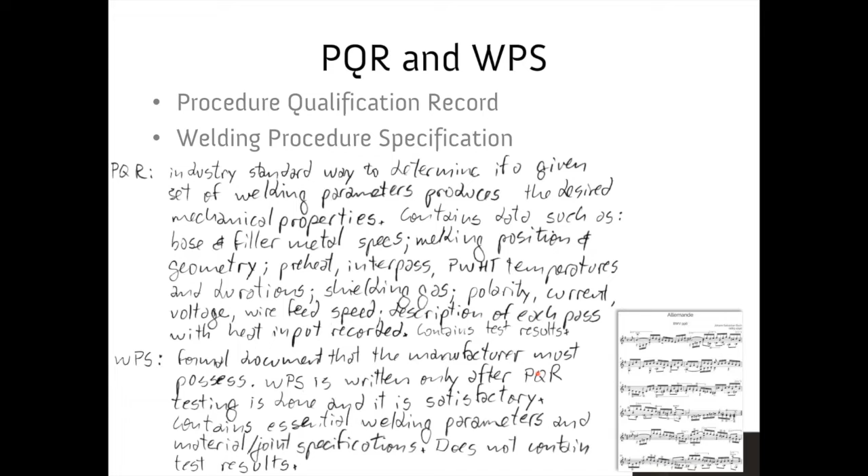Before you're doing a weld that carries some responsibility, we need to have this. If we're gonna be welding fences, we don't need to do that, right? Most of farm welding doesn't use this. But when you want to make a pressure vessel, when you're welding girders for a bridge, and when you're welding structures with responsibility, you need to have it.

So what does the WPS have? The WPS tells you the values of consumables, current, voltage, travel speed, wire feed speed, joint preparation, the sequence in which you would weld, preheat, interpass temperatures. So here we have a very simple example that comes from the Lincoln booklet on gas metal arc welding, which you have uploaded with the notes on welding processes arc, right? And you get to see, if you want to weld plate of certain thickness, they recommend these wire feed speeds, this current, this travel speed, this voltage.

Something interesting about welding is that in welding, we don't try to do the best possible job. And that's so odd to hear, and it's so odd to say. And I myself feel that there is kind of something wrong about it, but there's nothing wrong about it. You don't do the best possible job. What you do is the job that meets the requirement.

Now, if you could do something much better, then what you would do is something that is much cheaper, right? And if you think something much better is needed, then it's a conversation that needs to be had. For example, you can have a weld that has lots of spatter and looks super ugly. You know how to make a better weld, and you make the weld without any spatter.

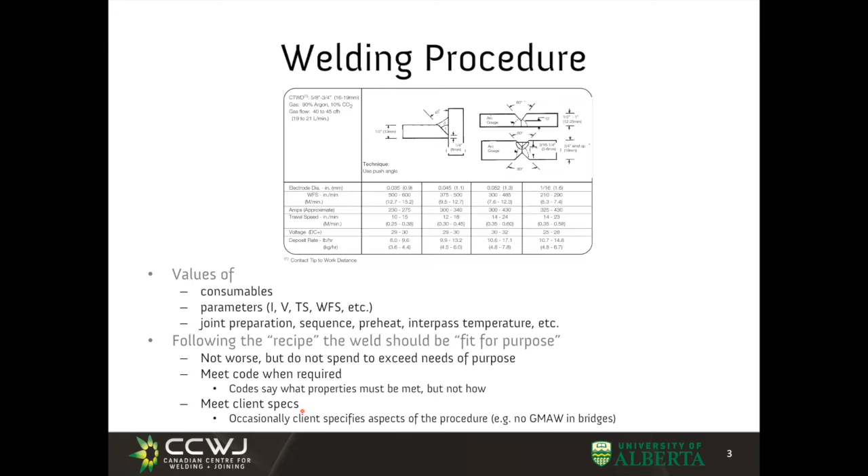Here you have an example of what a WPS looks like, right? This is a WPS that is done following ASME IX. That is something that we're going to be discussing in the last week of classes, the particular subtleties of codes, right? And here you would have the joint preparation, and you use the language of this code that says, okay, the P number, right? That means what base material you're using. You don't need to worry about memorizing this now, right?

And what range of thicknesses you worry about, what filler metal you have. And this procedure actually has a second page, but I wanted to show you what it looks like. What you have here is a music sheet. It's the same thing. The only difference is that in this case, the music is coming together with molten metal.

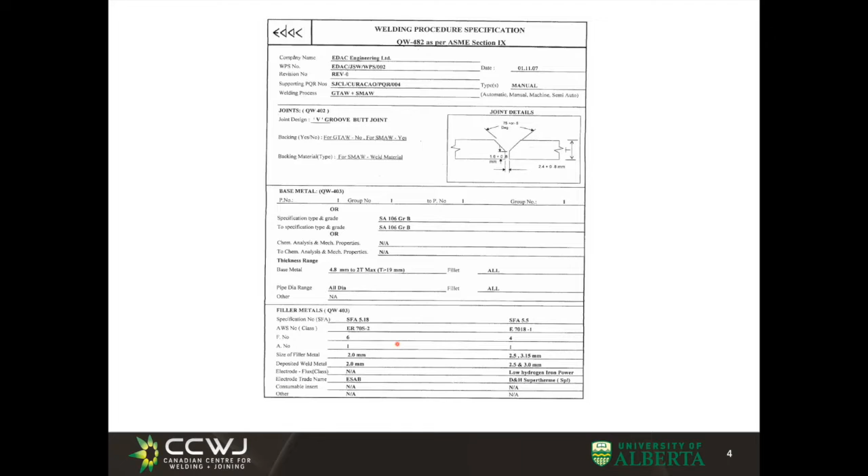Here, you have another example. This is a blank that comes from AWS D1.1. D1.1 is the code for welding structural steel. That is what is used for civil construction. So to some extent, very different than ASME IX. To some other extent, more or less the same thing. This is a music sheet.

In this case, what I'm showing you is essentially the blank staff lines, and it says, okay, what type of groove, what angle, what root opening, how big the root face, all these things that we discussed during our terminology lecture, right? And that's why at the very beginning of the class, we do this thing that I don't find particularly pleasant, that is learning this new language and all these new words.

And even if we didn't understand exactly what those words were, now they're starting to come together as we discuss different things. But in these two previous slides, all I wanted to show you is what this music sheet looks like in welding, how we tell the welder, hey, this is how many amps, so many volts, and you have to prepare the groove this way.

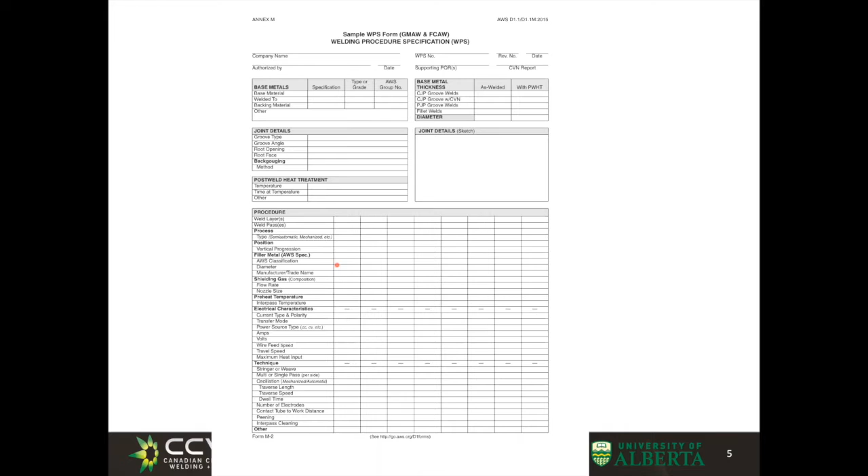We talked about the variables, right? The welding parameters. And without getting into depth, because we're gonna see this in a little bit more depth later, but as you can imagine, some things should not be changed, and some other things maybe don't really matter, right? For example, if I change the alloy of my filler metal, probably that matters a lot. For example, if I change the gas flow by a little amount, in MIG, right? Or if I change the electrode diameter, but not by much, maybe it doesn't matter, right?

And who decides that? Well, because we understand the fundamentals, we're gonna have a sense of why things can be so important or so not important. But when they are trying to make weld recipes for everybody, they say, okay, look, you don't think, we'll think for you. And this is what our infinite wisdom says. And in the case of ASME IX, it says there are three types of variables. They call them essential, supplementary essential, and non-essential. Obviously, the non-essential, they say, if you change it, is not a big deal.

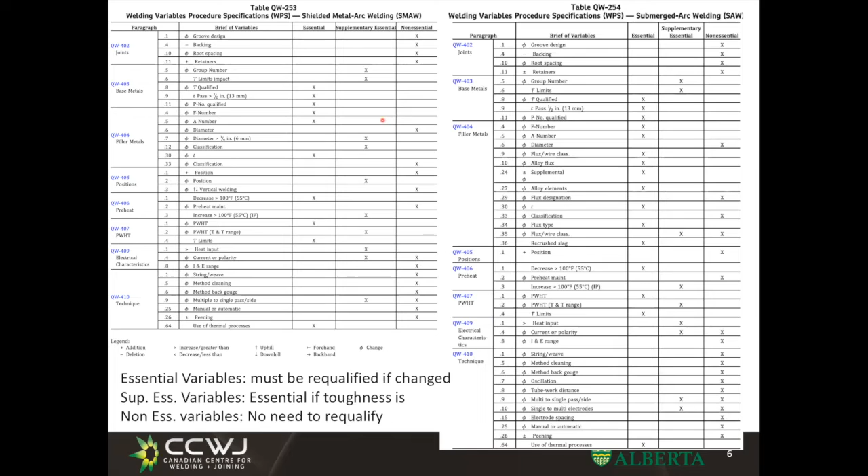So that said, right? If you want to make a pressure vessel out of titanium, ASME will say how you go about it. But for the vast majority of cases, we're going to be welding carbon manganese steel, low carbon steel. The vast majority of cases, so much so that some people say I don't even care about other things. I don't approve of that. Rockets are not made out of steel, or seldom, and they matter a lot. And you need to weld something. It's typically going to be structural steel. And you say, what I weld today, I'm going to do exactly what I did yesterday. And you know what? It typically works. It typically works great.

So for all of you taking this class, let me tell you something. 90% of welds, you didn't need me. You actually don't even need to know how to read and write. You just do today the same you did yesterday, and almost always it's going to work. And again, the problem is not the almost always, it's that when things don't, who's going to help you? And that's the difference between first world and third world. And I know very well about one of those, right?

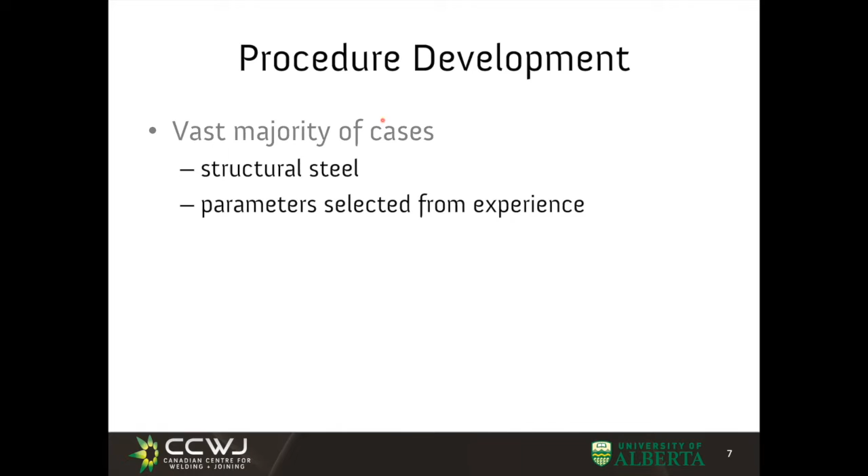Say you wanted to make a special pressure vessel for whatever reason you need it. For example, because you're dealing with oil sands. Chances are that what you did yesterday with the standard carbon steel might not help you. What do you do then? We need to know. All right. What can help you? All right, let's say what I did yesterday is not quite right for today.

I'm going to look at the supplier info. For example, this is information for 7018 from Hobart. It says if you get our electrode that qualifies for 7018 AWS classification, the 1/8 diameter, you should run it between 90 amps and 165 amps. 130 is the sweet spot. At that sweet spot, you should have more or less these volts, and it would melt this amount of wire, and this is the deposition efficiency. We'll have a whole lecture on efficiency, so let's not worry about this number right now.

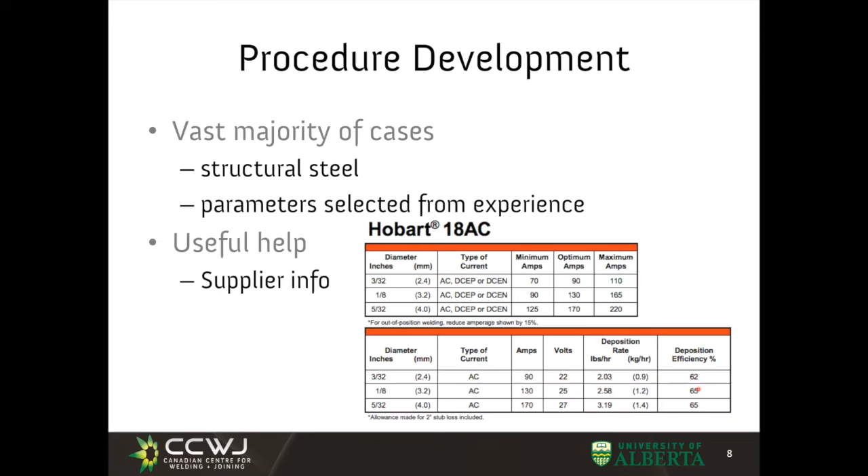So either I do what I knew yesterday, from yesterday, and I'm good, almost always. I call my supplier, or I go to the website and download the specs, and it already tells me the volts and amps. I'm styling. But let's say for whatever reason you still need to do something that is a little bit more difficult. Then what do you do?

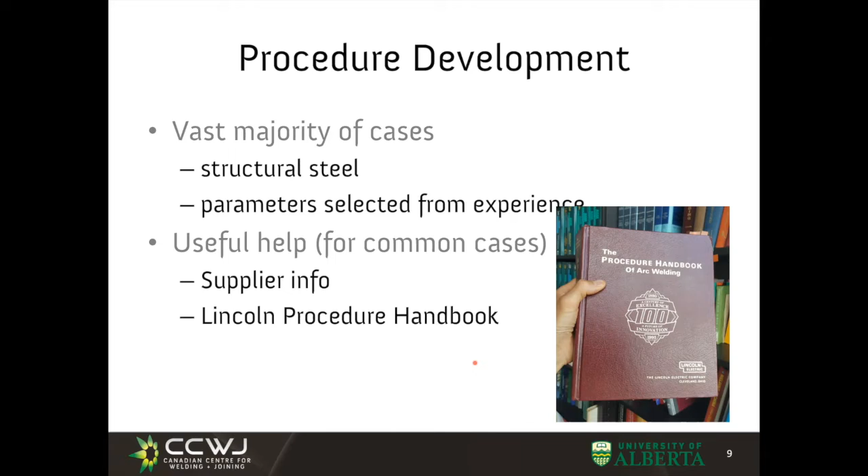You go to our Bible, right? Here I have it, I have two versions. The one I have here is the one that I got when I started my PhD. Now, if you have this book—oh my gosh—if you have skimmed through the book, that's why I said this book we need to have, especially for this lecture and for the next exam, you're gonna see lots of pages that look like what I'm showing you here, and I've scanned some of the slides.

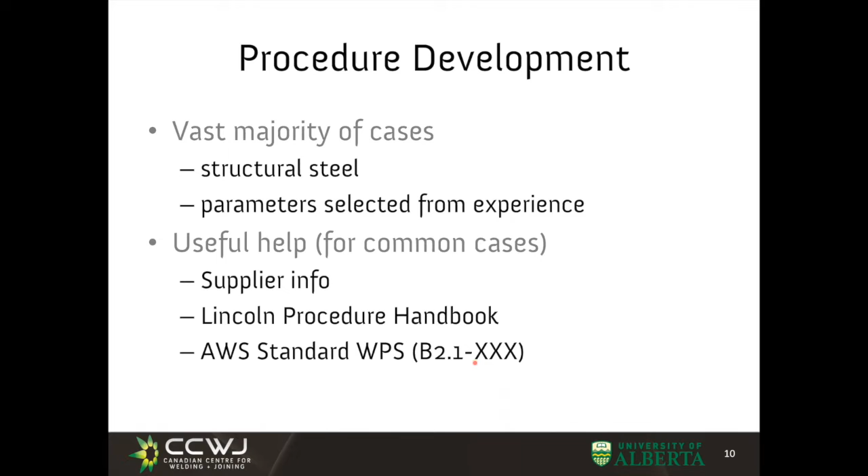AWS also has standards for some particular welds. So for some things in concrete, AWS will also tell you, this is the way you weld it. And these are expensive documents, because somebody had done these welds and tested them to make sure they work.

And if you go to the AWS site, these are the B2.1 standards. There's a whole family of standards, whether you're welding pipe or things for naval applications, sheet metal or plate, and different processes—MIG, stick, or TIG, they have TIG here—and depending on what base metal, right.

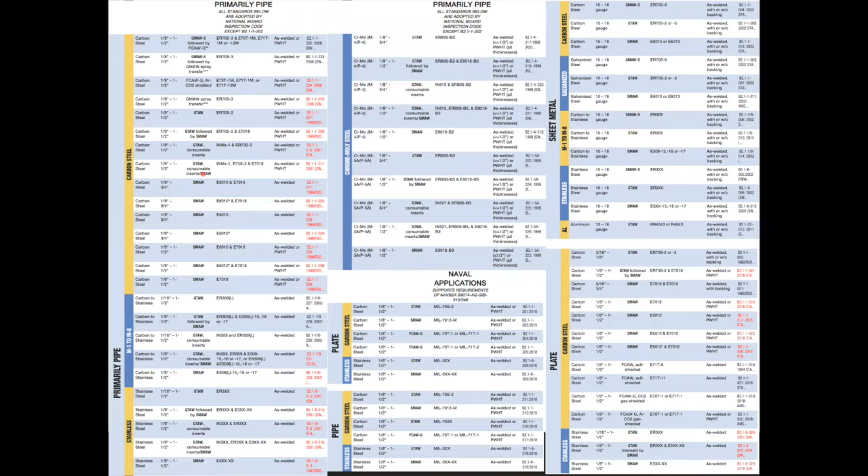So you have resources out there. Either you do what you did yesterday because it worked, you use the manufacturer's—the supplier of welding consumables—you use the Lincoln Procedure Handbook, which is an amazing resource, you can buy the AWS standards, the standard welding procedure specifications that I'm listing here. And even, there are even welding calculators.

So I have these two myself. These are like slide rules made out of cardboard, but they are so useful. And you can go online, and pretty much every supplier of welding consumables or welding equipment today has an app that asks what thickness you want to weld, what procedure, what process you want to use, and it will give you the volts and the amps and the travel speed.

Why are you taking this class then? Most of the time you didn't need this class, but you take this class because you will be the person who makes a difference when everybody else doesn't know what to do. You will be the person that, when there is a problem, can think and say, I think this is what's going on, I think this is what we can do to solve it. You don't need to take this class to weld what everybody else welds, but because you take this class, you will be able to do what few, if any, can do. And that's the point. But I want you to be aware of all these tools we have, because before we start thinking deep, we should use whatever is readily available. We don't want to reinvent the wheel.

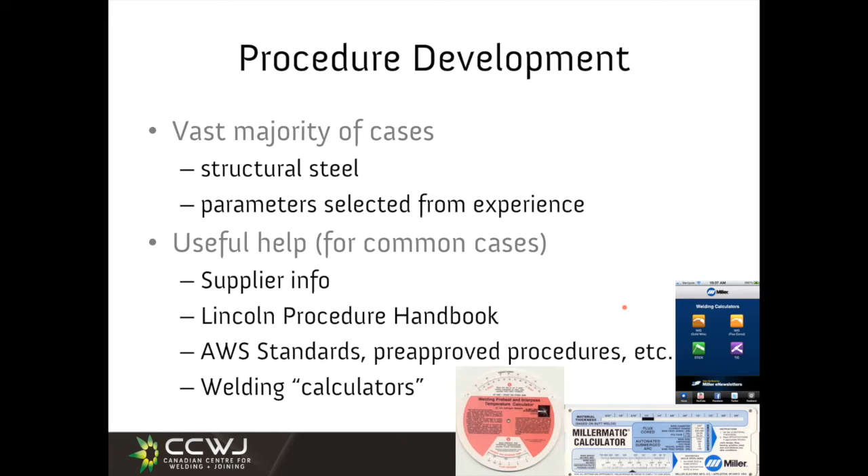What could be those problematic cases that get people stumped? Things that have an off composition. For example, when you buy steel, you say I want a steel that meets these specifications. Sometimes they don't meet the specifications, and you need to authorize a deviation, or maybe you don't want to authorize a deviation, but somebody needs to deal with that—and that somebody is paid well. Sometimes the plate material you bought says you should have all these things and you should not have all these other things, but they don't list all of the periodic table. They list the things that historically have been relevant.

It has been the case recently that some steels came with too much boron, but the standards said nothing about boron because boron was never a problem. And if you have some amount of boron, the hardenability of the steel is enormous. So you were buying a steel that met the specs as it was meant to be, but the steel sucked. It's even worse, you know.

From what I heard, in Europe there are restrictions on boron in steels. In North America, not. So the suppliers were sending the good steels to Europe, and we were getting all the other steels. Isn't that crazy? We need to understand what's going on so we can get good standards, and maybe have a client spec when we buy something, which now we do.

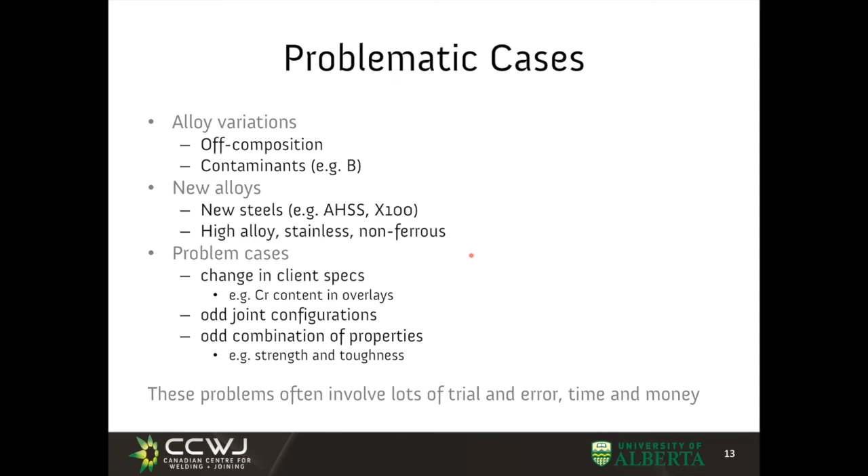So what we're doing today is I would like to navigate the Lincoln Procedure Handbook. It's early in the course, and we're already going to do essentially the bottom line - determine a procedure. And with that alone, you're going to be amazing when you get a job. The rest of the course will be understanding this to see how it takes us to the next level. Okay, so let's see.

So if you look at the chat, we have comments from somebody with Eddie, who has a long experience welding for real. So if Eddie agrees with me, then it's definitely true. Thank you, Eddie, for the comment.

I'm going to start talking about steels. And of course, we're going to be able to do aluminum and zirconium too. But steels is what everybody uses, what most people are using, and for which we have a lot of information. So let's not start running, let's start walking.

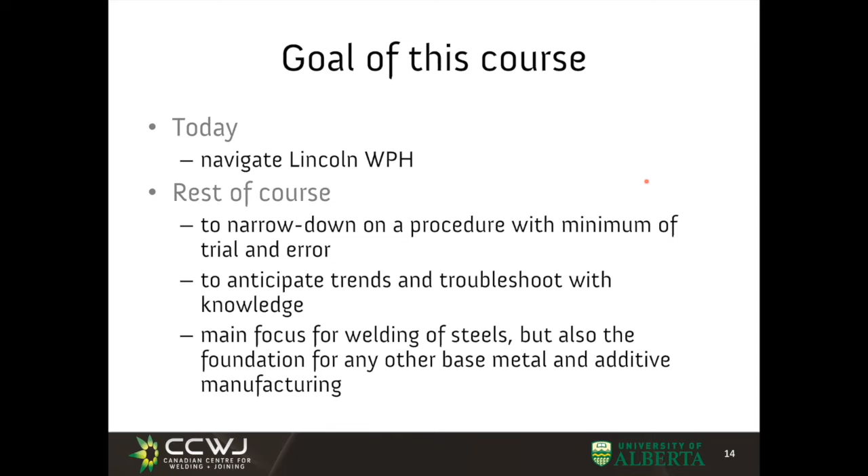Okay, for a welding procedure, I want to plant this as a seed. We're not going to use this right now, but for designing a welding procedure, which is what we're going to do in the rest of the course, we need to do three things.

One, we need to understand how the material responds to temperature. That is metallurgy, and we'll be talking about metallurgy starting on Tuesday next week.

Second, you need to know what temperature you're putting into the material. You know how the material responds to temperature, but you don't know what temperature you're putting in. For that, we need to do heat transfer. I know many of you took heat transfer with me during the winter. You're gonna see what amazing things can come out from heat transfer, which we don't teach in the class, but it's very much similar to the things we did in class, and we can predict important things.

And third, we need to understand the behavior of the process. Even if I have the same material with the same temperature experience, it's not the same with short circuit versus globular transfer versus spray transfer, because the physics and mechanisms at play change the depth and width of the bead and many other things that affect the final look and final properties of the weld. We're going to discuss those when we talk about metal transfer, the plasma arc, and other things.

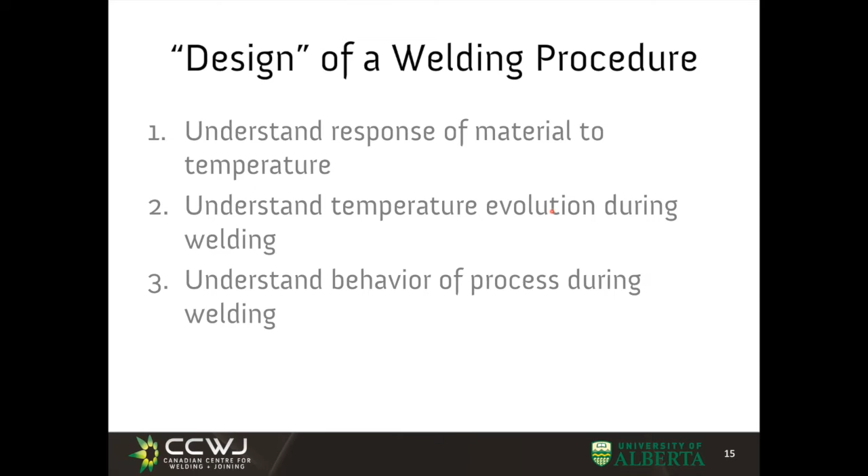So, well, I don't need to say more about this book. And on this note, what I'd like to do is check with you and go into a group task. We are more or less 20 people in the class right now, and what I'd like to do is divide you into groups so you discuss things, and I'm gonna be popping into the different breakout rooms.

I know one of our friends here doesn't have the handbook yet, so I'm going to make sure I pair this student with others who have the book. Does anybody else not have the book? I think most of us do. No book? Okay, we have two. Anybody else? Okay, thank you, thank you. You have to tell me.

Okay, so we have 1, 2, 3.

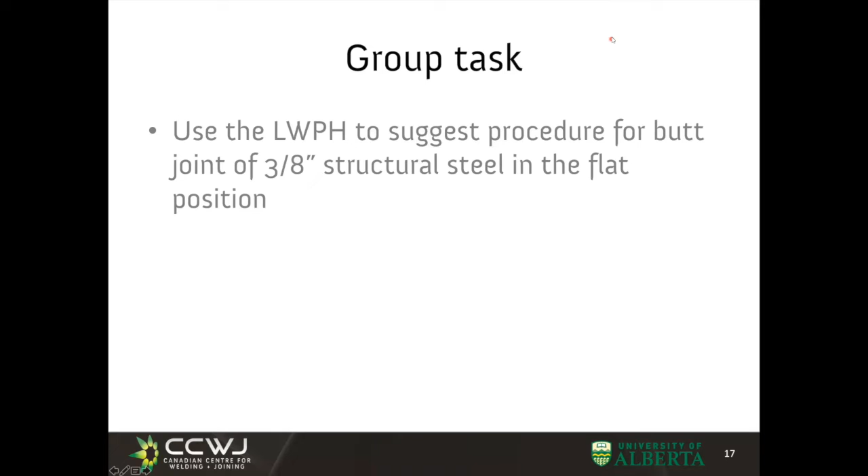If anybody wants to share, say anything in the chat. I visited each of you, and I think it went more or less okay. I hope you did. You guys enjoy it? Anybody wants to comment? Was it okay? Yeah, it was good. All right. It was good to see some faces. Yes. Isn't that something new? Getting to see your other classmates.

So we have 20 minutes, and in these 20 minutes, what I would like to hear is what procedure each of us has done. So I would pick randomly somebody from each group to say a couple words and discuss that procedure. Let's start with Eddie. Do you want to discuss, Eddie, briefly what procedure you chose? You can say the page number. Yeah, briefly, page 6.4-23. 6.4-23. All right.

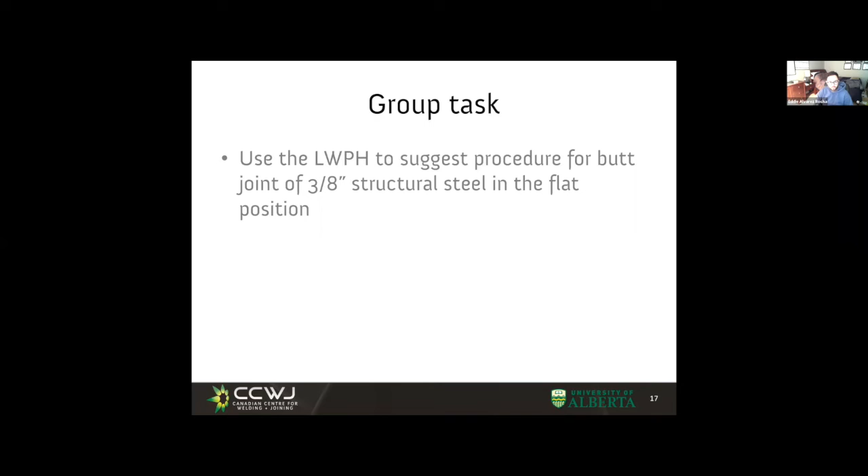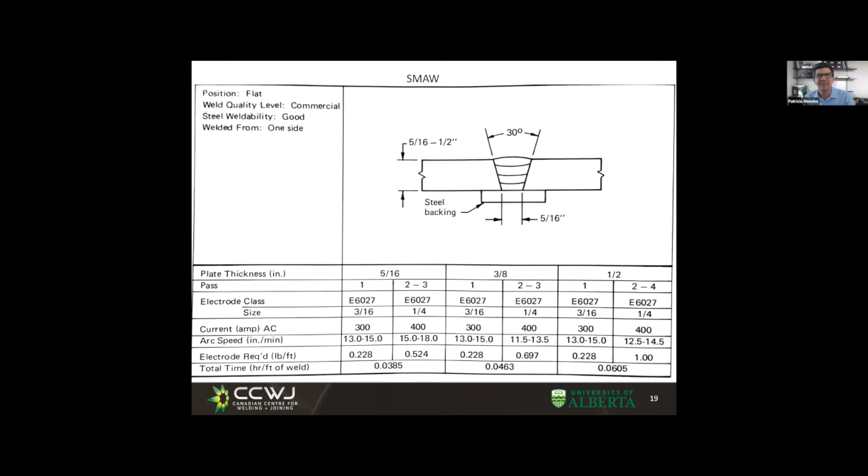Let's see. 6.4, oh, very early. Okay. 6.4-23. Hold on. Oh, we have a different version. Oh, no. Okay, we don't have a different version. What procedure is 6? Self-shielded flux core. You're close. Yeah, close. Mine is self-shielded flux core arc welding, semi-automatic self-shielded.

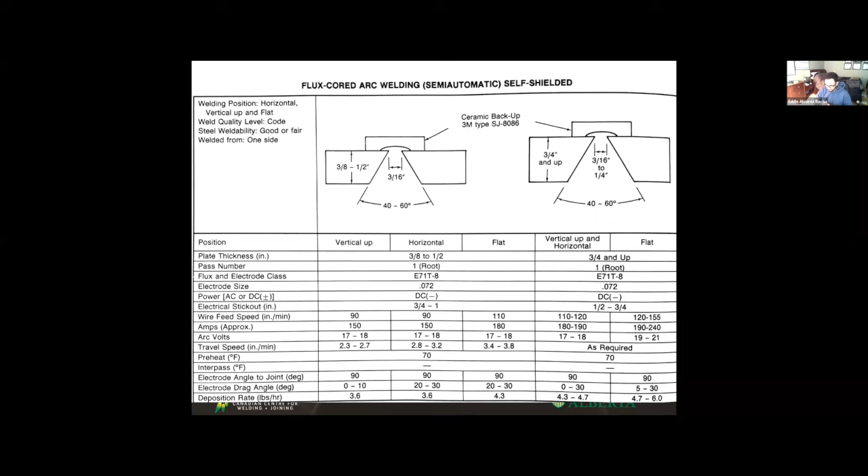Only thing to add that's not really stated in the question was the steel backing. We chose this because it's self-shielded. It's for structural. So for structural, this is commonly used. It's quick, and yeah, I don't know what else. Hold on. I got it there, right? This is it. Yeah, that's it. Yes. It's awesome for 3/8 steel, it's easy to work with, and especially if you have steel backing, you can really pour it on there, and it should be quick, right? Yeah, and this is awesome.

This is awesome. And what I want to highlight here is, although you guys are only starting to take this welding class, as of today, you can go to a welder and say, look, for this particular application, if you weld it using this procedure, it's likely it's going to pass the qualification. This is very powerful. This class is not only about the theory, of which you'll see plenty, but you already have a magic trick up your sleeve when you have a job. So thank you, Eddie, for the suggestion, and thank you to the teammates.

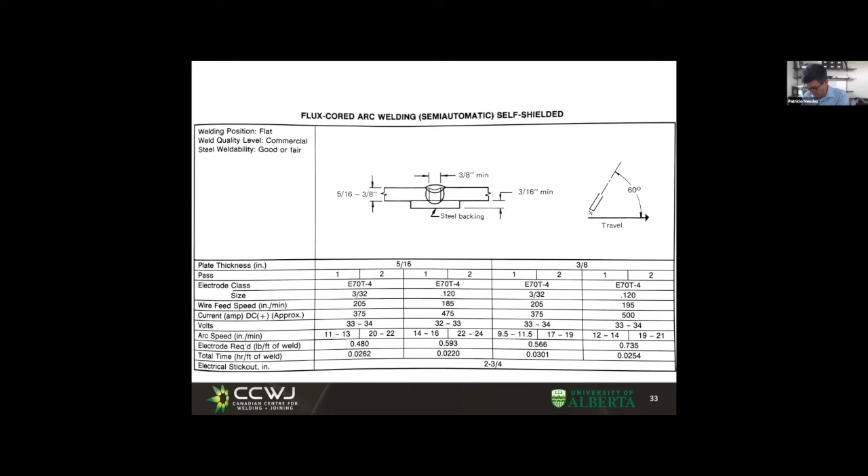6.3, or 6.2. 6.225. 6.225. All right. I'm looking it up because chances are that I already looked at it early in the morning. Aha, I like that. Actually, this one I went deeper into detail. So it's shielded metal arc, stick welding.

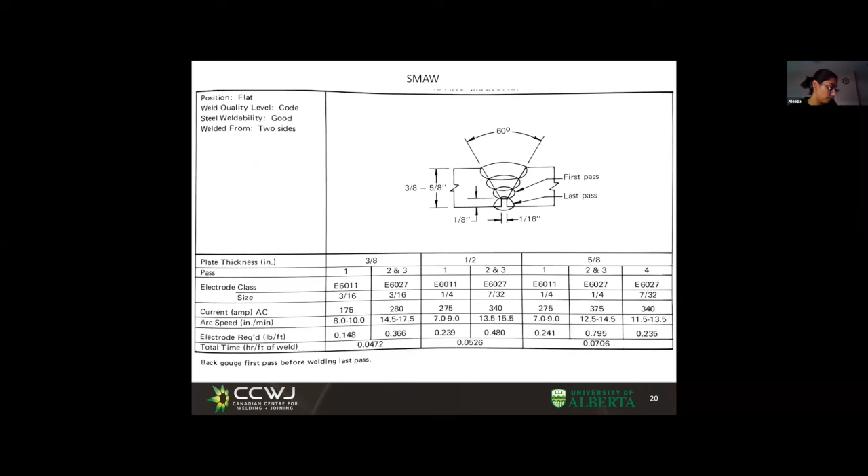Yeah. And we chose the one without the metal backing just because we didn't have enough instructions, and we thought that it would be better to go without it just because it's not always available. Right. You see, a funny thing is when we come from an engineering side, we don't like the backing. It looks ugly. When you come from the welder side, you say, this is going to help me.

And we go back to the fit for purpose. If it is fit for purpose, it doesn't matter if it is ugly, right? So this is great. So here we have 3 passes in this one. And what is interesting about this one is the first pass is in 6011, right? If you remember, that's a cellulosic that has a potassium binder, so it can run on AC, right? It is what we would use with cheap welding machines.

And 6027 is an electrode that has lots of iron powders, so it gives you a very fast fill. It is similar to 6024, but it gives you a higher quality deposit. I don't know exactly why that is, but it is the alternative to a high deposition electrode when you want a slightly higher quality. Thank you. So yeah, this would be good.

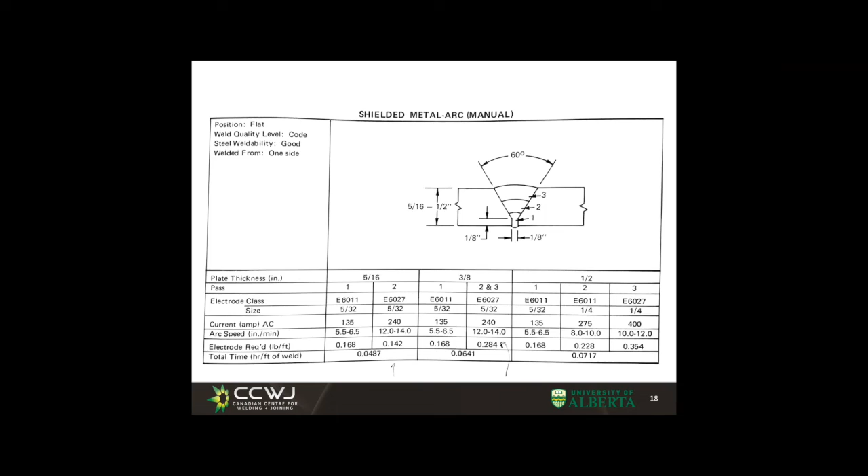Sure, we've found a couple. So one of the ones we were looking at, I believe, was 6.3-67. 6.327. All right, you're talking about subarc welding. I like that. We're talking about all kinds of processes, huh? Okay. Yeah. So it was good for 3/8-inch commercial steel. Is it 37 you said? 67. 6.367. Okay, give me a second because I'm gonna show it to the whole class.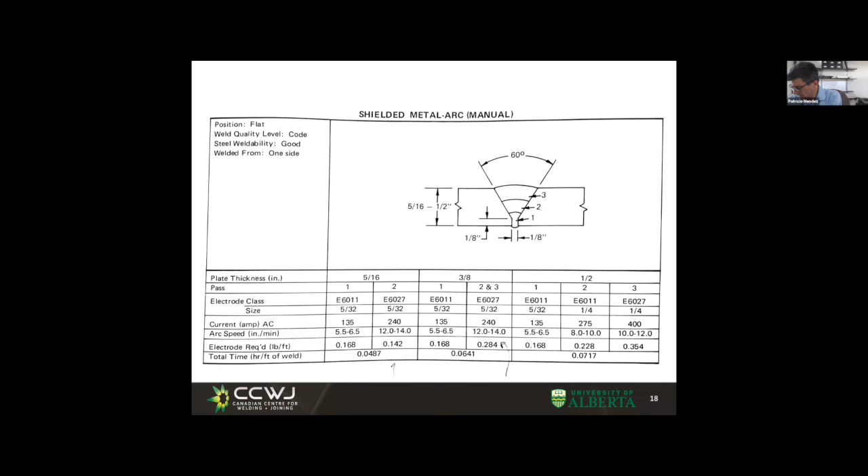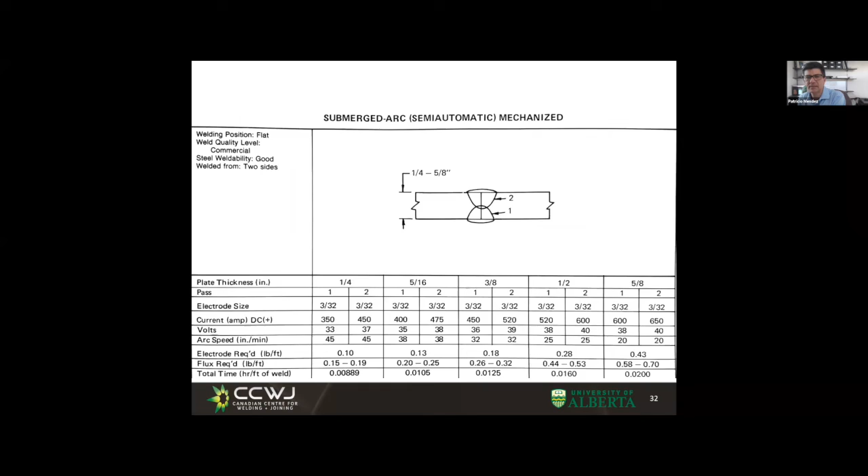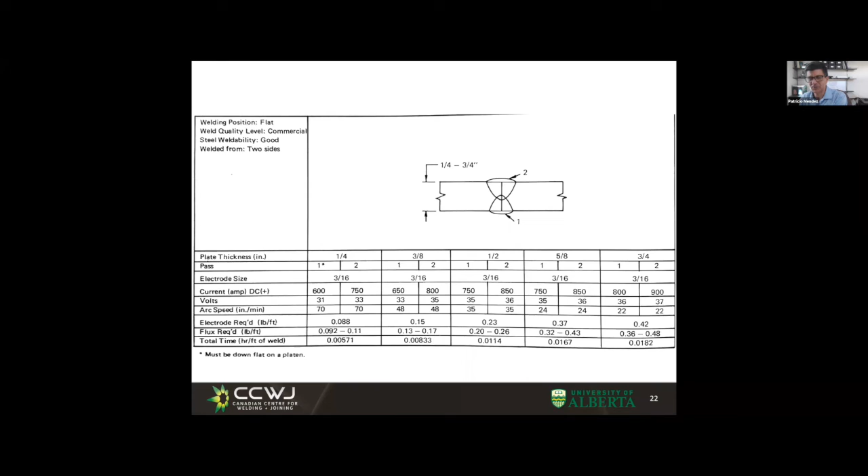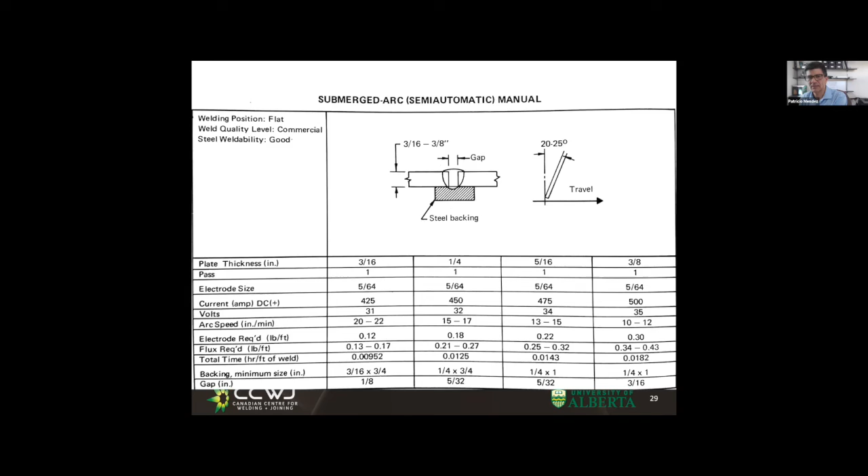I might have it, subarc welding. The 367. No, I passed it. It's moving. No. I think it's, no, not this one. Not this one. Show the middle. Subarc welding. Let's see. I need to recognize it. 316 to 38. Not yet. 38. Did you get it? Is it? Yeah, I think.

Awesome. All right. So tell us more about this choice of procedure. Well, we looked at a bunch of different procedures, and then we chose this one mostly, I believe, for the total time required. It was the shortest of all the ones that we found. Yeah, that's awesome. And you know what? Of course, that's the idea of subarc welding, right?

This high productivity. And if you remember our very first class, when I talked about the T-34 tank that the Russians were making, the difference between the Russians and the Panzer tanks is that the Russians were welding the tanks with subarc welding, and the Germans were using stick welding. You cannot compare it. So I like your choice too.

Again, a shop might or might not have a subarc welding machine, right? So sometimes the decision is not as easy as saying this is just faster or this or that, but what do I have around? This is great. So let's move on. Wesley, do you want to tell us about what your group chose?

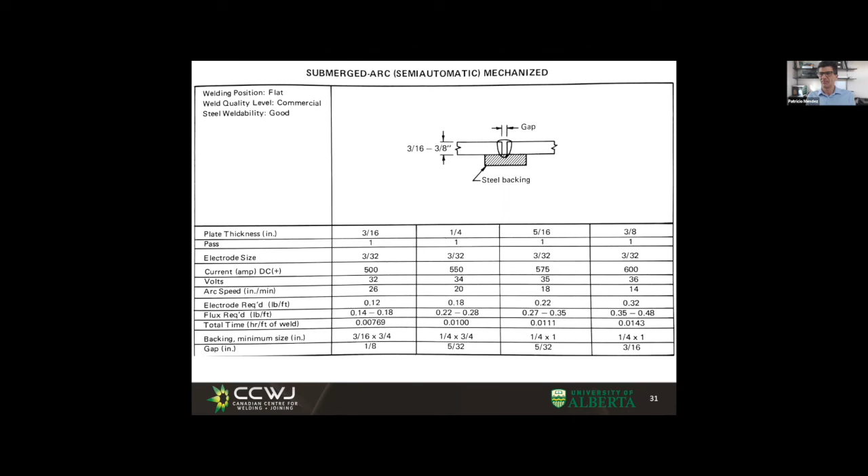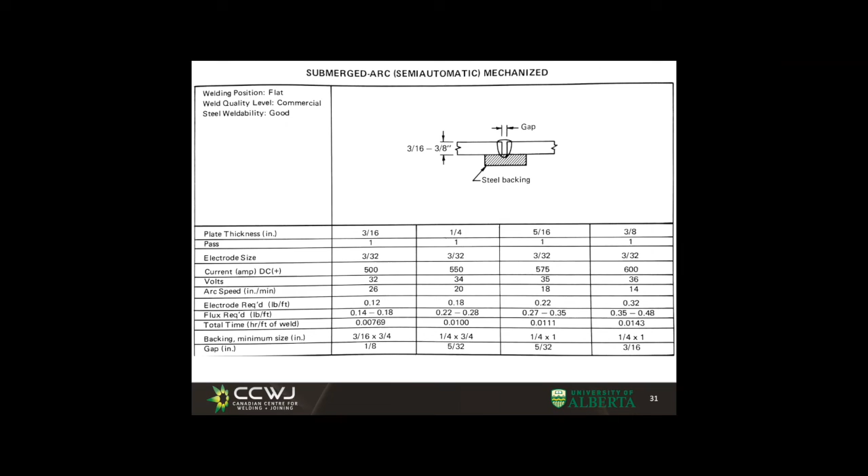Yeah, absolutely. We did discuss a couple of them. However, there is a procedure on 6.3-44. 44? 6.3-44, yeah? Yes. Okay. I personally find this procedure interesting because it involves two different processes, SMAW and submerged arc. Plus it has the twin wire submerged arc, which is pretty awesome. 1,000 amps when we're doing the cap and stuff like that.

But the initial closure pass would be done with SMAW, and then that side would be filled with twin wire subarc at 1,000 amps, and then flip it over, grind it, and weld the other side with subarc welding at 1,000 amps. It'll be fast, it'll be high quality. It is welded from both sides, but they're both in the flat position.

Yeah. So very interesting. So here we have one interesting thing to discuss. That is, in this weld, we needed access from both sides. Other solutions had access from only one side. And sometimes we don't get to choose, right? Sometimes we cannot flip the part. So absolutely. I agree. One of the things that I did mention to our group was that

the constraints we had, it being 3/8 plate in the flat position, I said, there's a lot of other questions which will determine what we need to do. Do we have access to the other side? Just like you mentioned, what's the purpose of the weld? If it's only a seal weld, we don't even need to prep the joint at all, just weld over where the two plates meet. But this procedure is totally overboard. So that's what I found interesting.

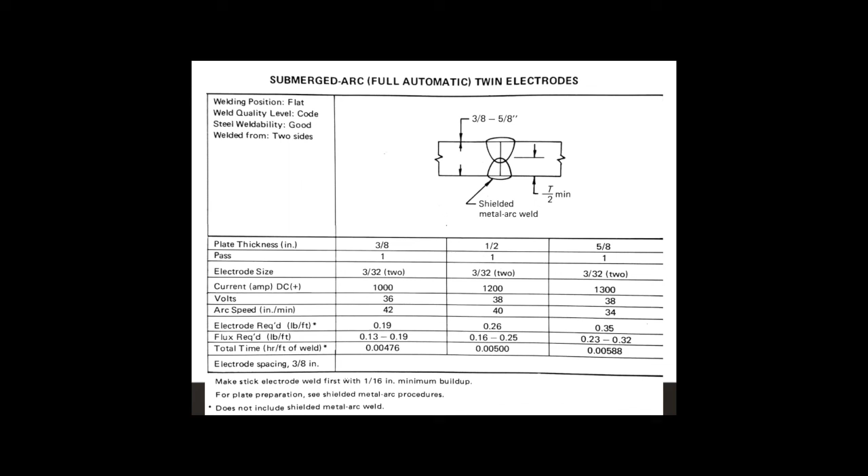This is awesome. And as we switch to Jolene, I remind you of the amazing thing here: I gave you such a clear statement, say, weld these 2 plates of this steel at this current, of this thickness, in this position. And there's so many ways you can do it. So far, we have 4 different solutions that involve 4 different processes. 2 of those are sub-arc welding, but one was with 1 electrode and the other is with twin electrodes.

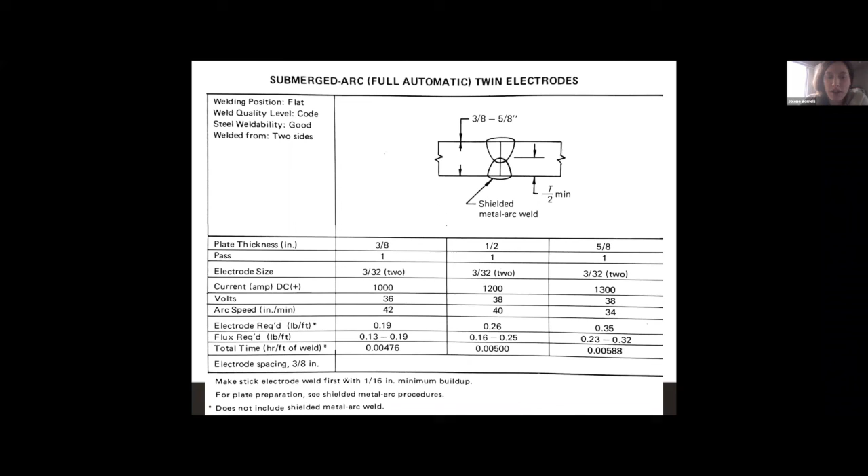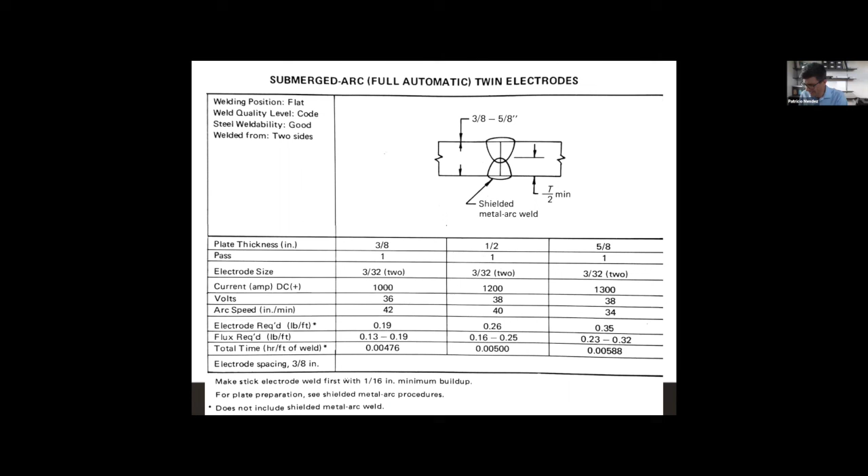Very interesting. So Jolene, because you were the last, I hope you had something that nobody mentioned before. I hope so too. I've kind of lost track of the numbers, to be honest, but one I think that we haven't done is 6.7-7. Whoa, okay. So that's 677. That's big. And this is awesome because I also saw it. So let me go there. I scanned 31 solutions today, although some of those were for other positions. This is what you said, Jolene, right? I believe so, yeah. All right. So what do you see in this weld?